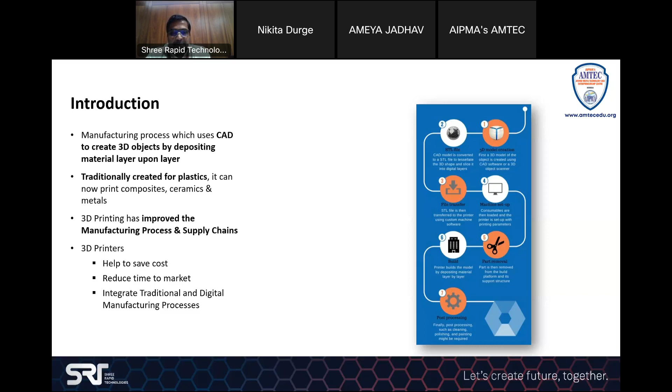Some of the advantages of 3D printing is you can do just-in-time manufacturing, so you don't need to keep any dies and molds. You're also very quick in design and production, as well as modification of the designs. You can also minimize wastage and make strong, lightweight parts.

This is basically done by topology optimization. There are a lot of softwares available where you can optimize the weight of the part without compromising the load carrying capacity or stress carrying capacity. A lot of work is happening in India and abroad in this field, and this especially applies to plastic as well as metal.

We see applications in aerospace, especially space, and different kinds of lightweight manufacturing applications are coming up. Even some applications are in electronics manufacturing, especially chip manufacturing and semiconductor manufacturing. A lot of machine components are being made using 3D printing.

As we have advantages, we also have some limitations. We have low volume production; we cannot go very high volume. For mass production of parts, I think conventional technologies still hold good.

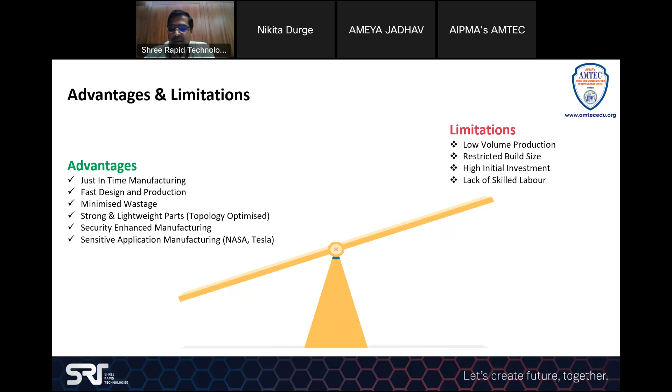The investment for 3D printing production machines, the initial investment, is very high. You don't actually need very skilled labor, but you need people skilled on 3D printing. So the lack of 3D printing skilled labor is one of the bottlenecks companies are facing today. I'm saying this as a problem, but it's also an opportunity for the new generation to get trained on 3D printing and become accustomed to these technologies, and there will be a lot of job opportunities.

So what are the different technologies available? Stereolithography is the technology where we use a liquid resin, and with the help of a laser, we cure it and make a solid part.

As you can see in the video, the part is built from a liquid bath and comes out of the bath after it's complete. This is completely unattended, and this is why it's the mother technology of all 3D printing, because it was the first 3D printing technology launched. The STL file, what we call the interface nowadays in 3D printing, actually comes from this stereolithography. STL was the interface developed for the first 3D printing machine in the world, which was stereolithography. That's why the file is still called stereolithography.

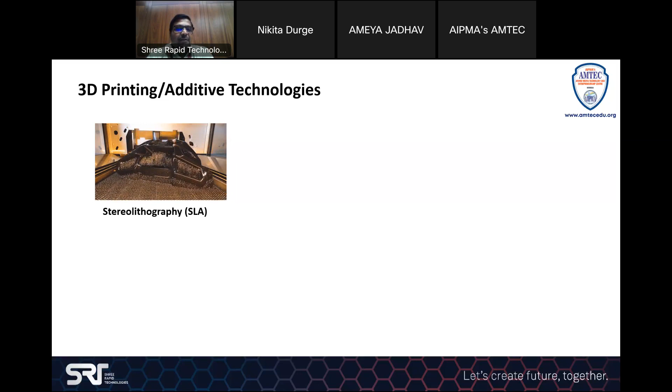The next technology is DLP, digital light processing. Here, in contrast with SLA, we cure a whole layer at a time by projection. In stereolithography, we use a laser beam to draw the part in an analog way. In DLP, we project the whole layer at a time, in pixels, in a digital way. It's a faster technology compared to SLA, but because of the way the curing takes place and the limitations of DLP technology, we cannot go beyond a certain size limit. DLP basically depends on the DLP projector.

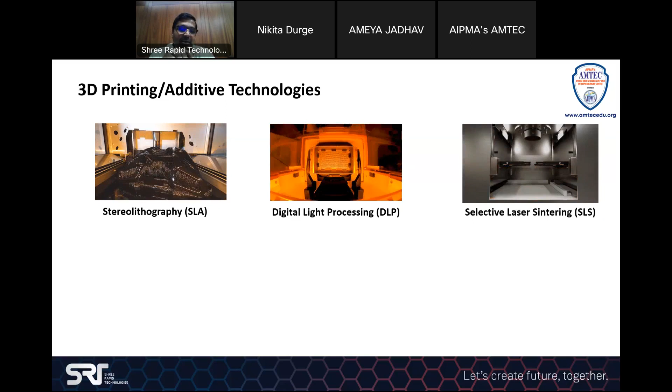Now there's also a parallel technology to DLP called LCD. Instead of DLP, people are using LCD as a light source, and there they can make bigger parts. The third biggest technology in 3D printing is selective laser sintering, also from 3D Systems, called SLS. Like stereolithography is called SLA and digital light processing is called DLP, this is SLS, selective laser sintering.

Here, we make parts from a polyamide nylon powder by melting the powder using a laser beam. Unlike SLA and DLP, which use liquid resin as raw material, in SLS we use plastic powder as raw material. That's the biggest advantage of this technology, and because we use plastic powder, it doesn't need any supports. Since we're making parts directly from polyamide powder, the parts are almost as strong as injection molded parts, and that is why, wherever you need functional prototyping, people use SLS technology.

So the fourth technology is multi-jet printing, also called MJP or MJM, multi-jet modeling. This technology was trademarked and patented by 3D Systems in the 1990s.

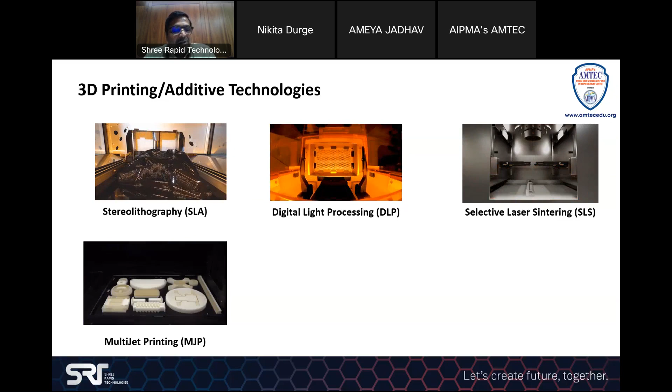As the name suggests, it's actually a 3D printing technology because we use a print head to deposit the part. Inside the machine there's a Xerox print head which prints and deposits material on the platform. Initially people called 3D printing or additive technologies rapid prototyping, but when we launched multi-jet printing with the 3D print head, the technology started being called 3D printing. So the name 3D printing comes from this technology, because we started using a print head for printing.

So accordingly, we can discuss what is the origin of this technology.

Then we have fused filament fabrication, the technology everybody is aware of, used for desktop printing, which basically uses ABS, nylon, or PLA wire, heating the wire and depositing it. We represent a brand called BCN3D from Spain, used for this type of printing.

We have a dual extruder printer where we can make plastic parts, and we can also use carbon fiber based materials. Nowadays different kinds of composite materials are available, and with these we can make functional prototypes. But fused filament fabrication has limitations in speed, accuracy, and resolution.

The last technology is direct metal printing, which is similar to plastic sintering. Instead of plastic powder, we use metal powder, and we use a laser beam to melt the metal powder to build the part layer by layer.

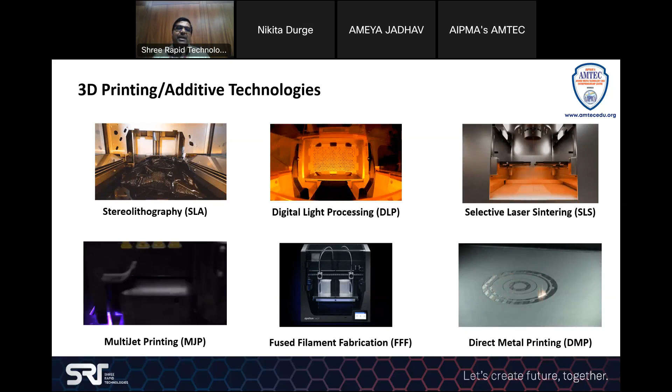On this screen you can see the major technologies available in the market which are leading the field. Even today, in plastics, SLA and SLS are the two technologies still leading the industry, and in some markets DLP or multi-jet printing technology is becoming famous. All these technologies use some kind of depositing method, curing, or fusing medium, along with some kind of material.

In SLA and DLP we use liquid resin. In SLS we use plastic powder. In direct metal printing we use metal powder. And in fused filament, we use plastic wire or filament for deposition.

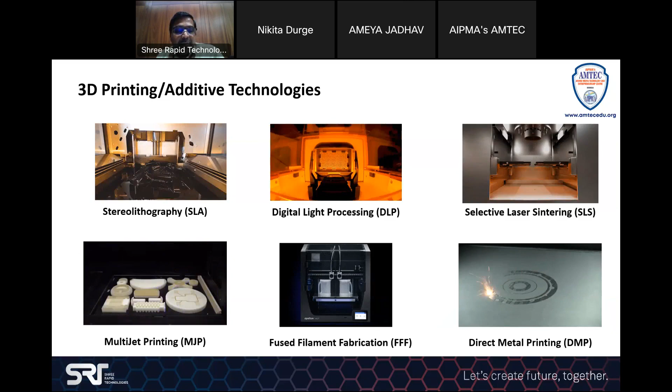So we have an agenda to develop our know-how and generate manpower for future requirements in additive manufacturing. The figure is a little old now, but we have 600 plus installations, and we have decades of experience.

We have highly trained engineers in-house in service, application, and sales. We have a state-of-the-art 3D printing center here in our facility with almost 18 different types of 3D printing systems. I'm not talking about desktop printing, I'm talking about production printers. Anybody who wants to come and get exposure is welcome, and we can arrange that.

We are also partnering with AIPMA, AMTEC, for bridging the gap between 3D printing job requirements and industry through education and our expertise. We are committed to imparting knowledge and helping develop skills for the 3D printing industry.

AIPMA has designed courses for 3D printing, where we also participate along with our people and contribute. In the same way, we can also provide job opportunities in our own company as well as at our customer's places for such trained people.

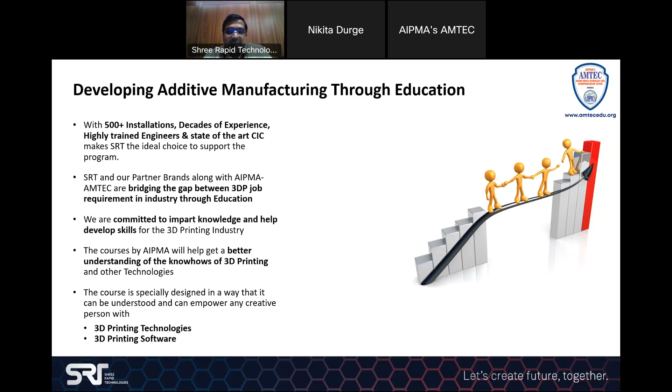So what are the roles involved in 3D printing, and what opportunities exist for people in this field? Many multinationals and corporates have started recruiting additive design engineers or DFAM engineers. A lot of conventionally manufactured parts are now being reconsidered, as people realize we can use 3D printing or additive manufacturing technology to gain advantages in design for functioning as well as design for manufacturing applications.

At the same time, we have opportunities for application engineers, whose job is basically to train people on 3D printing, to explain to customers the applications of 3D printing technologies, how it differs from conventional technologies, and what the advantages are compared to conventional technologies.

Then we have additive manufacturing engineers, who actually run the machines and processes using 3D printers. We also have printing technicians and operating managers, operators using the 3D printing machines, and service engineers, since with so many 3D printers sold in the market there's a lot of demand for people who can service, maintain, and calibrate these machines.

So all these roles are required as the technology becomes more and more established in the market.

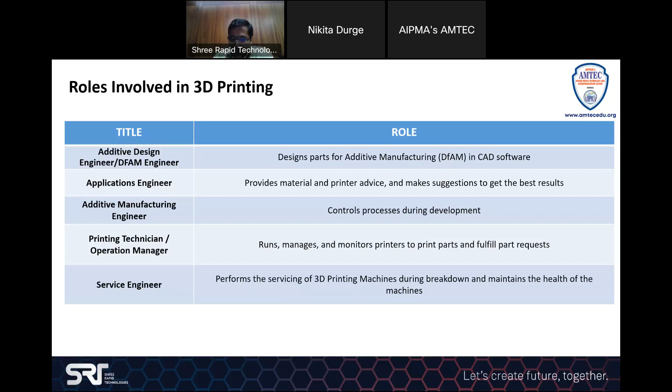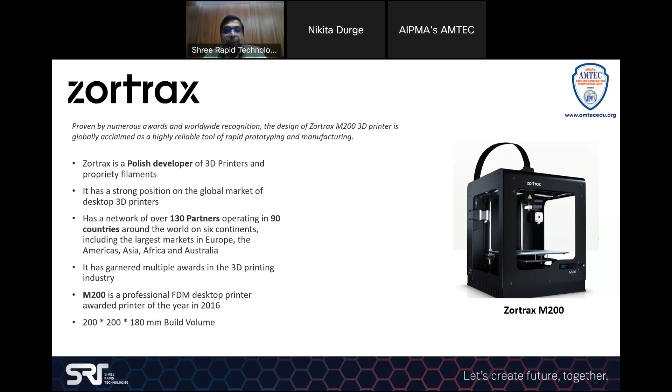It's a very good technology for people to understand how, layer by layer, a part is manufactured. So this basic course consists of an introduction to traditional manufacturing and how different technologies of 3D printing work, like I showed you.

So it can be a STEM program for all, and it's a 20 hour course at AIPMA AMTEC. We have also trained their trainers, so their faculties are trained with this kind of course too. Here you can also get some hands-on software knowledge, and do one or two part builds if possible, but basically there is a theory, an exam, and a practical on the Zortrax printer.

There is also a little bit of introduction to the next level of 3D printing technology, that is Figure 4. This is a very good course, and I would say any novice or any person who is inquisitive about what 3D printing is should do this course. It will help them get accustomed to the whole technology and understand how it is different compared to conventional technologies.

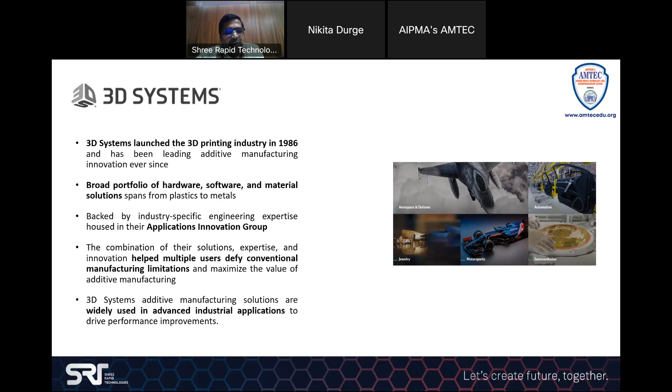It has a build volume of 124.8 by 70 by 196, and we have another model with 300 millimeter by 350 millimeter. This technology is very high speed; we are able to do almost 50 to 60 mm per hour in build height, which is very fast. At the core of this technology is DLP, but it's a very advanced DLP technology by which we are able to make almost production quality parts.

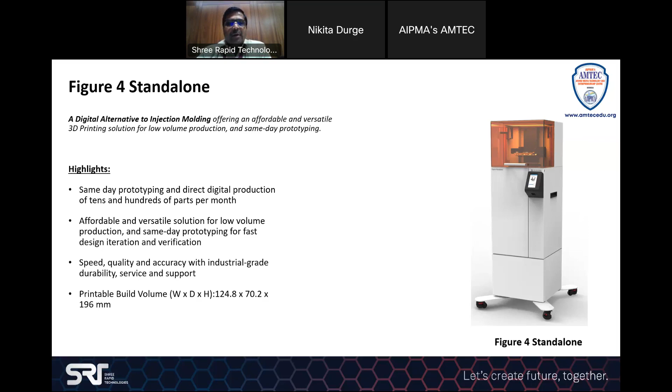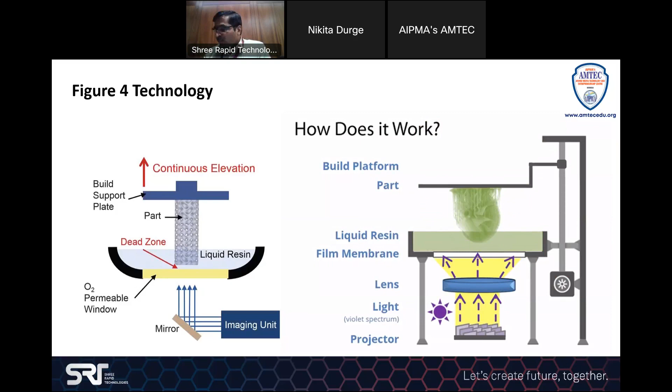Okay, so the advantage of this material technology is that you don't need to have a lot of material in store for the machine. Even with 1 kg bottle of material, you can start building the parts. So that gives the advantage that you can try different materials very quickly without much investment.

And we have close to 30 different materials available on this technology, starting with biocompatible, high temperature, rubber-like, transparent, black, white, ABS-like, or PP-like materials. That gives really good exposure to the various kinds of applications we can do with a very small investment.

So this machine is in the range of 25 to 30 lakhs, but it gives an application and it can build parts like injection molded. So if there are some listeners to this webinar who are from the injection molding industry, who make very small or medium sized and very complicated parts, this is the right technology for you to try.

You can make parts within hours. I mean, a 100 mm, 150 mm part is done in 2 to 3 hours time, and you can actually get the part when you are out for lunch, and see the part in your hand, which is almost like molded quality. So that's a great advantage this technology gives.

So this machine is also installed at IPMA, and I request every plastic company, manufacturer, or R&D or development team to have a look at this technology and try to build a part.

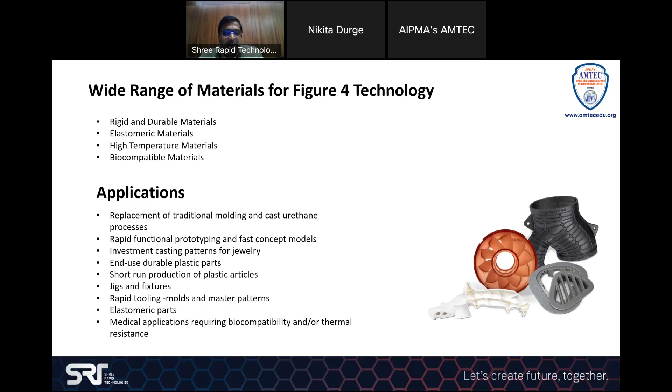There's a 3D system technician course. It's an advanced course, and this is with the help of a Figure 4 machine. We have part building experience, designing experience for supports, different printing technology, different material properties experience. So all these things we can train, and also give some experience on how we finish the part, secondary processing. It's basically a very good course for 60 to 70 hours.

It's an advanced course, and I advise you people to attend it at least after the basic course is completed. Then you can go ahead with this course.

You can see the number of companies trying to adopt additive manufacturing, and in India also a lot of companies are going towards adopting the technology. Already all the automotive and auto ancillaries are using 3D printing. But there is also a lot of opportunity for businessmen who want to start a business in 3D printing.

There is a very good opportunity for job shops using 3D printing technologies, and that is one of the biggest advantages I can tell you.

So what AIPMA AMTEC can offer is basically hands-on training, visits to industries who are using 3D printing, and you become industry ready with a 3D printing certificate course under your belt, so that you can be ready for the job, where we can get a placement for job opportunity.